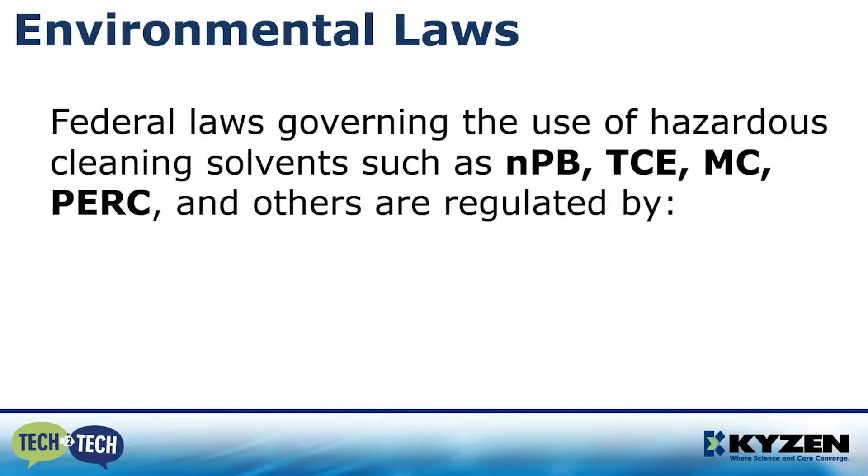If you're using solvent, you already know that federal laws governing the use of hazardous cleaning solvents such as NPB, TCE, methylene chloride, perchloroethylene, and others are regulated by both the EPA and OSHA. What you may not be aware of is that chemical risk evaluations for any new laws regarding specific substances are often influenced by the following organizations.

The main one is the ACGIH, American Conference of Governmental Industrial Hygienists. This is an organization that advances occupational and environmental health recommendations. It recommends threshold limit values for occupational exposure guidelines.

There's other organizations that the EPA refers to: the International Agency for Research on Cancer, the American Association for Cancer Research, the Sierra Club, and many other organizations dedicated to our health.

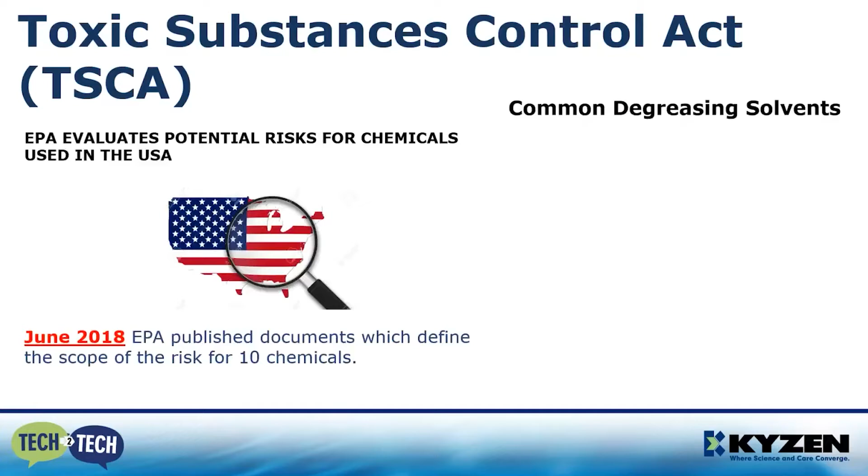EPA has the Toxic Substance Control Act, called TSCA, and the EPA evaluates potential risk for chemicals used in the United States. In June 2018, the EPA published documents which defined the scope of risk for 10 chemicals. Of those 10, 5 were common degreasing solvents used in the market: NPB, methylene chloride, NMP, perchloroethylene, and trichloroethylene. The risk associated with those is what the EPA looks at from environmental health, safety, and concerns.

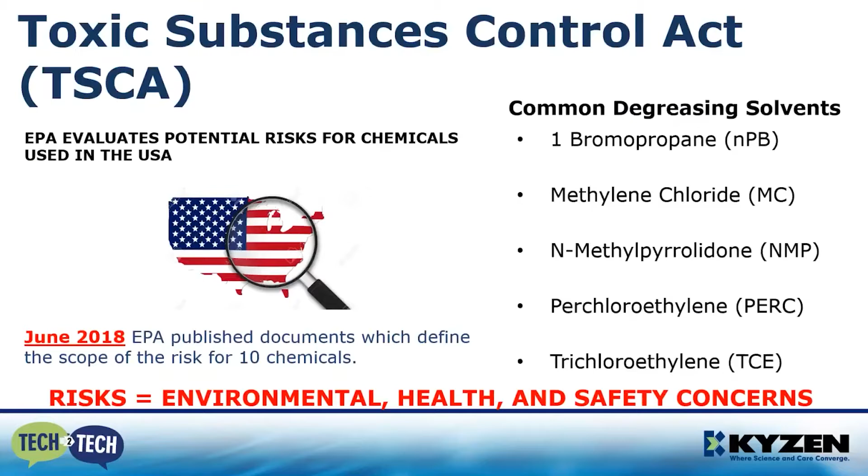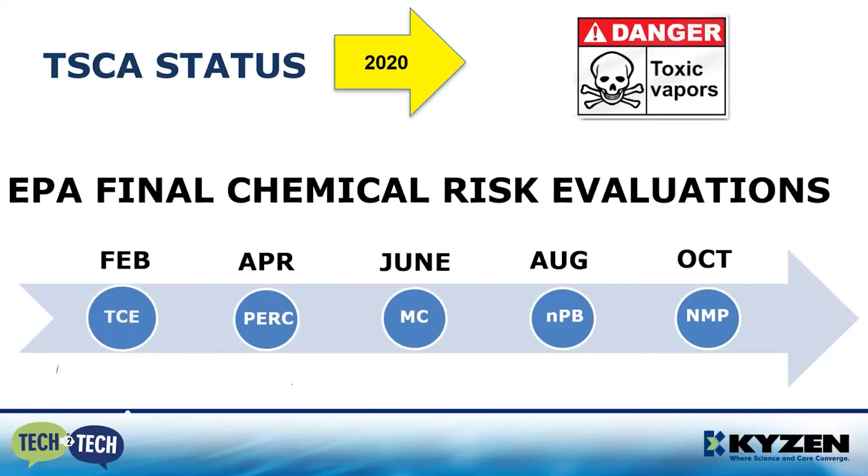Let's fast forward to TSCA in 2020. The EPA this year has finalized chemical risk evaluations for these 5 solvents: in February, TCE, due to toxic vapors; in April, PERC; in June, methylene chloride; in August, NPB; and in October, NMP. You can see they're moving at a fairly fast pace, releasing chemical risk evaluations every 2 to 3 months.

If you're using any of these solvents, we strongly recommend you obtain and review the final chemical risk evaluation for your solvent, because most of these contain direct statements that the EPA has determined the use of these substances presents unreasonable risk to human health. And we all know that's dire consequences.

There's a selective phase out going around the globe for these solvents. As they change, you will be affected by it.

Once the final risk evaluations are released, what happens next? Well first, the step required by TSCA is developing a plan to reduce or eliminate the unreasonable risk identified in the final risk evaluation. There are panels and experts that make up these risk evaluations, and most of the time, it's not reducing it, it is eliminating that particular product.

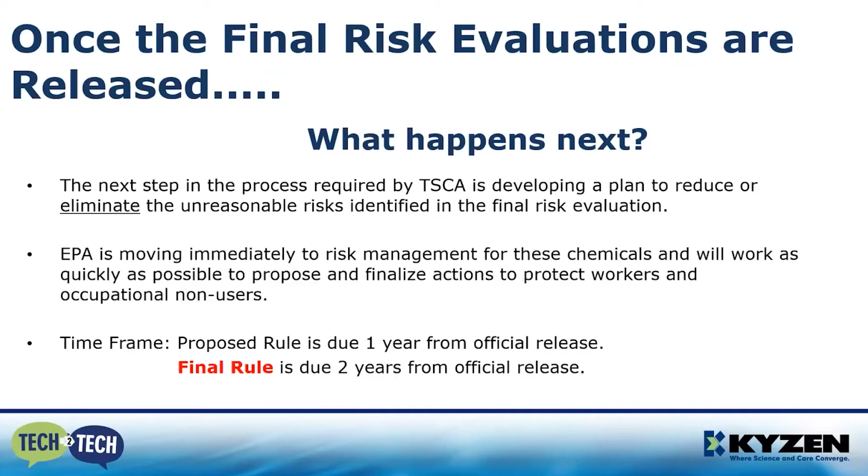The EPA is moving immediately to risk management for these chemicals and will work as quickly as possible to propose and finalize actions to protect workers and occupational non-users. The time frame: once the risk evaluation is released to the public, the proposed rule to either regulate or eliminate that substance is due 1 year from the official release. The final rule is due 2 years from the official release.

So you have time to consider, but change is going to happen. Once these risk evaluations are out, these solvents are going to be regulated either more severely or eliminated.

So what you look for is EH&S concerns first. If you have to replace or modify your process, always look for EH&S concerns. The solvent process: do you stay with solvent or do you change to a different process? How will change affect your production issues? And the total cost of operation is all important.

So what do you want to accomplish? Well, first, you want to make things better, and you want to move to environmentally green cleaning processes. You want to find the right financial balance. Calculate the end cost of all alternatives: the cost of compliance, the cost to change the process, the cost of quality, and the cost of operations. All these factors come into play.

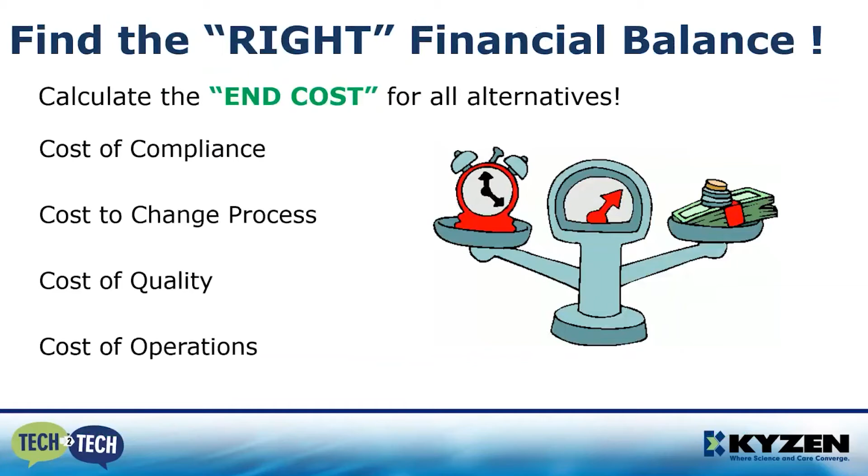And remember, the EPA clock is always ticking. So look before you leap, because the cost of failure can be dramatic and disruptive in your operations.

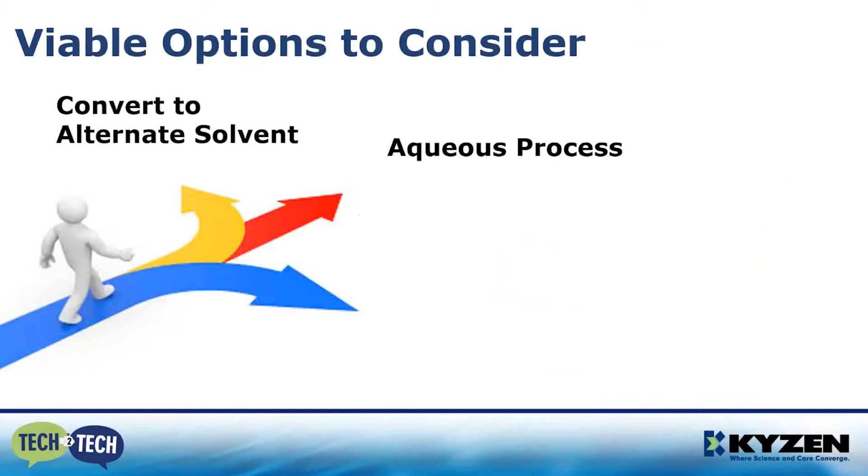You might ask yourself, what are my viable options to consider? Well, you can convert to an alternate solvent using your existing degreasing system and change the solvent inside. You can convert from solvent cleaning to an aqueous process, or you could look at vacuum degreasing technology. We're going to discuss those options briefly.

If you future-proof your option number one, you could replace your existing solvent with another type in your existing degreaser. The most common on the market today, and basically approved currently by the EPA, are transblend solvents, HFOs, and HFEs.

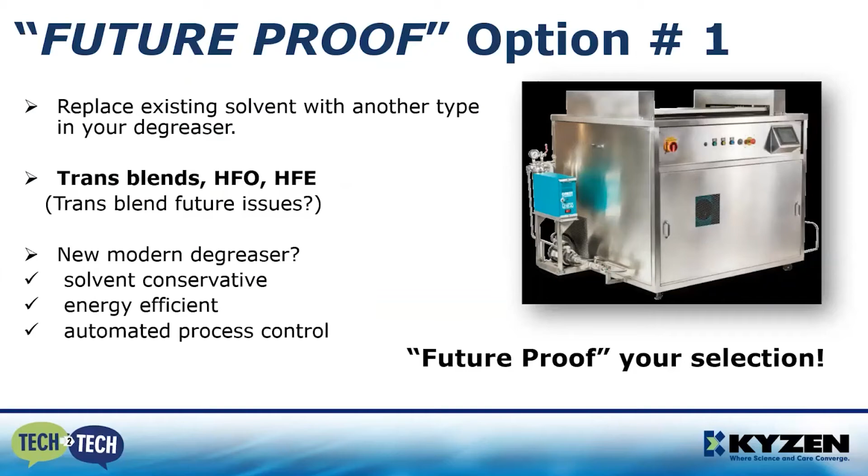However, transblend may have future issues and it's already being looked at in Europe. A new modern degreaser may be required.

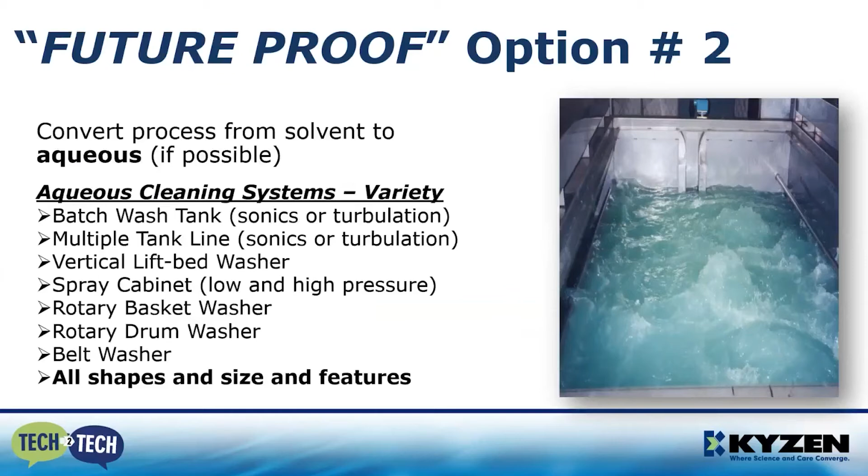Another option is to convert the process from solvent to aqueous if possible. Aqueous systems vary in sizes and shapes and types. You have batch washer tanks, multiple tank lines, vertical lift bed washers, spray cabinets, rotary basket washers, rotary drum washers, belt washers. You may already have some of these systems in your plant and be familiar with them, but there is a wide variety to choose from.

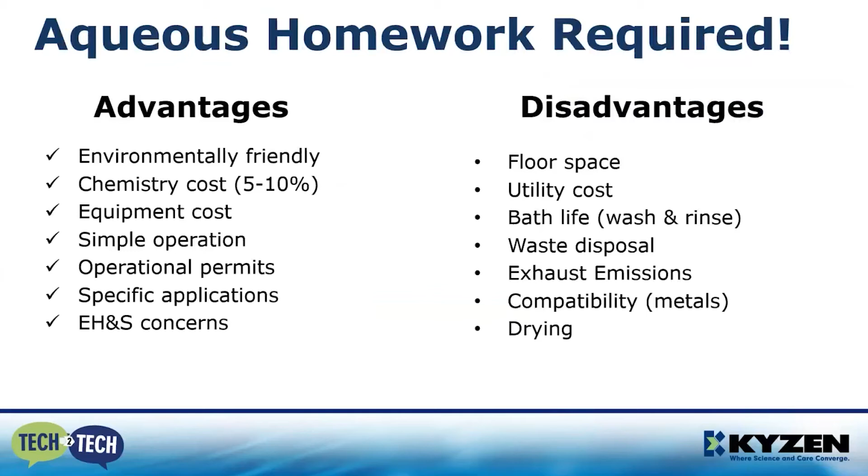However, if you're looking to go from solvent to aqueous, homework is required. The aqueous systems have several different advantages, but they also have some disadvantages. So you need to understand each item and how it would affect your production, your material handling, your process, your quality levels, and cost of operations. We can provide technical assistance if desired to help you understand all these issues and look forward.

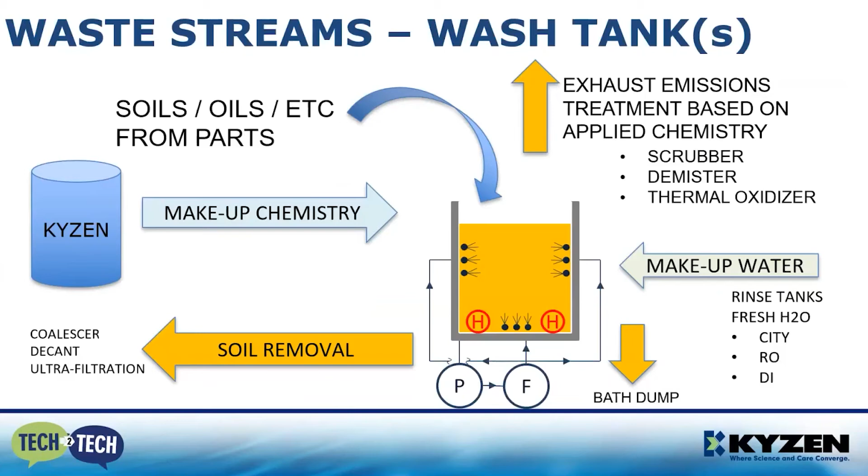Waste streams in the wash tanks, there's a wide variety of parts that contribute to this. The soils and oils that go into the bath, the makeup chemistry, the soil removal to keep the bath fresh or renewed, the exhaust emissions that go out have to be considered, the makeup water coming in. Take the soil out or you dump the bath.

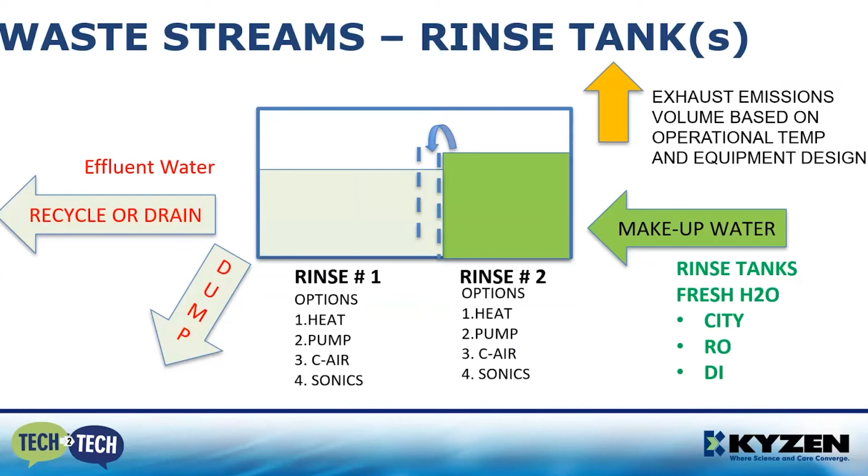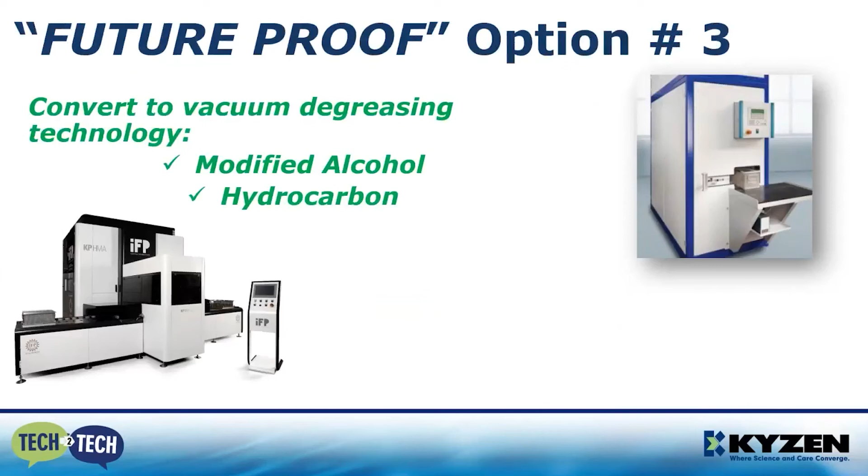Another option that is future-proof is looking at converting to vacuum degreasing technology. You can use modified alcohol or hydrocarbon, and as previously stated, there's a wide variety of vendors, models, and features to consider.

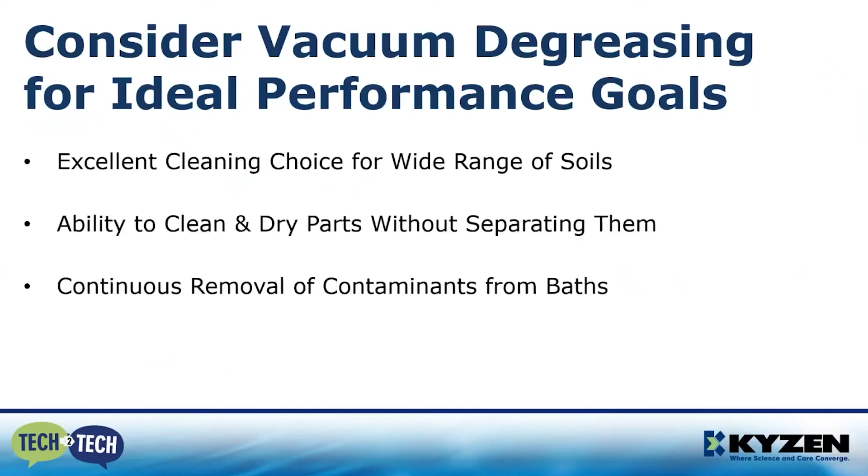If you consider vacuum degreasing, it's an ideal performance for the goals. It's an excellent cleaning choice for a wide range of soils. It has the ability to clean and dry parts without separating them. It's continuous removal of contaminants from the bath. It isolates the operator from the process, and this is a safety plus.

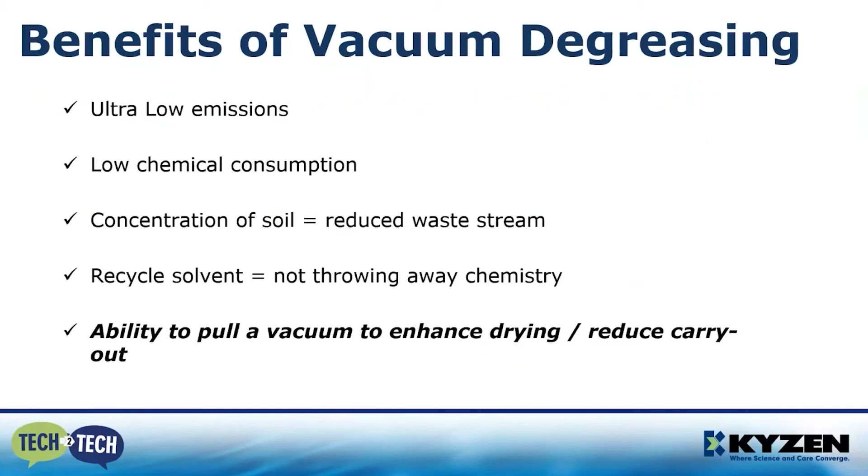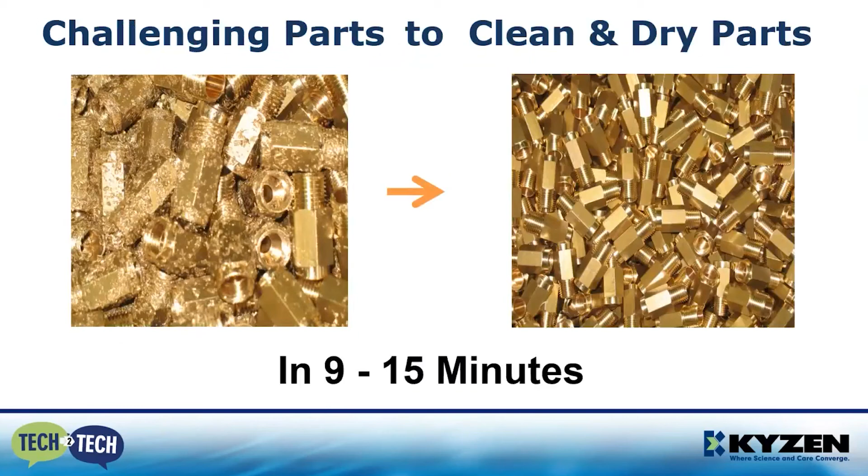And the ability to pull a vacuum to enhance drying and reduce carryout is my personal favorite, these systems really excel at that method. You can go from challenging parts to clean and dry parts in 9 to 15 minutes. These are unretouched photos of actual parts processed in a vacuum degreaser, much easier and better performance than aqueous systems.

Vacuum degreasing provides ideal performance in a wide variety of parts, shapes, and sizes, and different types of materials. This is very difficult to take and clean and dry and de-chip these parts in an aqueous process.

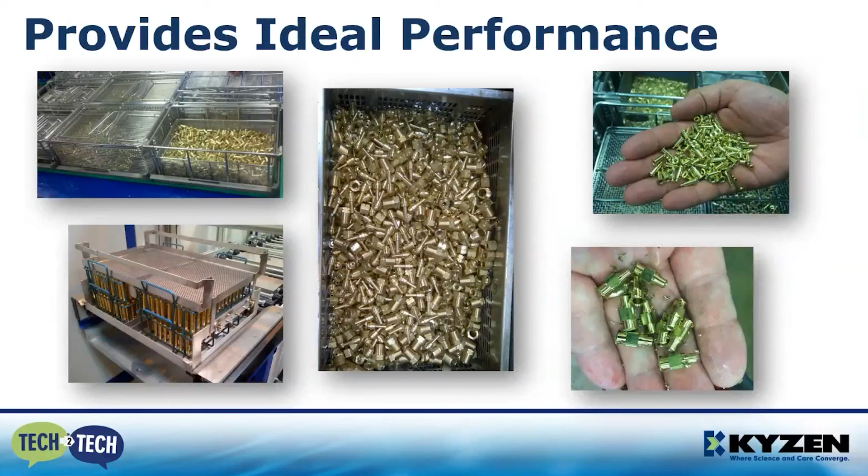It meets environmental compliance. Modified alcohol is a non-hazardous, biodegradable organic solvent. It's been around for a number of years and has a lot of compliances from different global organizations. The EPA confirmed it is not a HAP, and it's not flammable by an NFPA classification. And it's proven compliant to ISO specs for in vitro cytotoxicity for medical use.

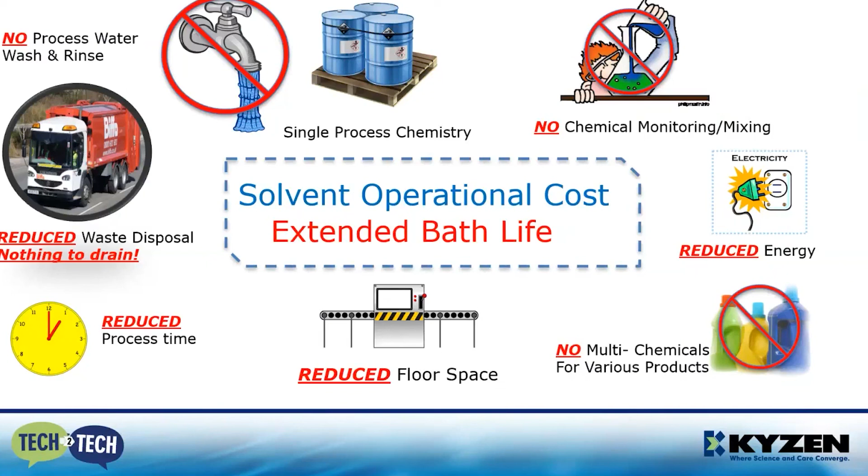All these operations of vacuum degreasing use no process water. It's a single process chemistry. There's no chemical monitoring or mixing, reduced energy, no multiple chemicals for various products such as the aqueous systems, reduced floor space, reduced process time, and nothing to drain. All this improves your performance and operational cost.

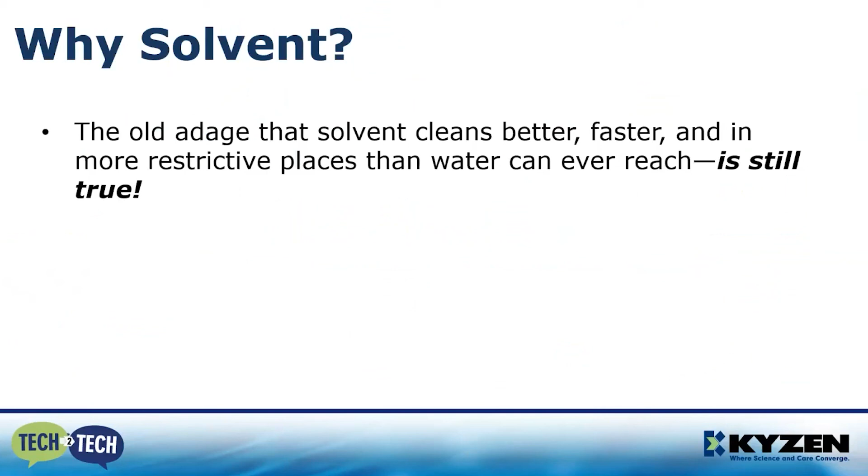Why solvent? The old adage that solvent cleans better, faster, and in more restrictive places than water can ever reach is still true. Vacuum degreasing meets the process requirements with maximum efficiency, and it yields cost-effective results. Vacuum degreasing is the fastest growing global cleaning technology in today's world in regard to replacing the traditional degreasing solvents.

In summary, you still have time to make your plans, but remember the clock is ticking. Examine your alternatives. Accept the EH&S challenges that come with this change. Get expert advice from a business you can trust. Find the right financial choice, and please look before you leap. Thank you, and that concludes our session for today.